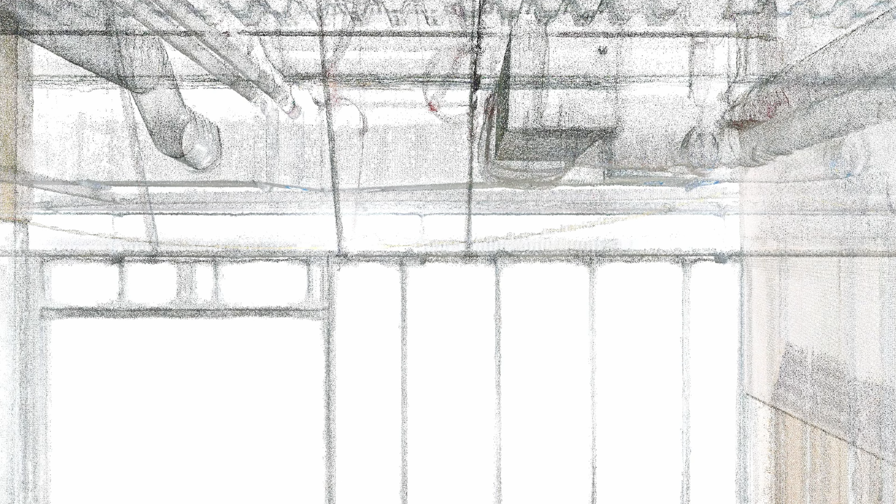So ultimately not really a fair comparison as far as density goes. That kind of goes out the window. We'll take a look at the two data sets. Actually, I'm impressed with both of them. I don't want to give too much away before we dig into it. But yeah, so that helped us define how to do it better inside of Geo Week, which is going to be really cool data sets. Anyways, let's dig right into it.

Okay, so I didn't cut anything. I just decided to fast forward through me refamiliarizing myself with CloudWorx. The problem with trying out so many different softwares and learning so many different tools is you kind of forget how to use some of them. So it's embarrassing, but I had to struggle through some of this.

One of the things I noticed right away is the clarity on the imaging from the NavVis. It's just phenomenal. When it finally all loads in, it's quite colorful. It's really clear. Now, the goal was to have an unfiltered point cloud. That's impossible with the NavVis. As soon as you load it in, it runs through some filtering. The Orbis, we were able to do it without. You have a little more control that way. But it's very minimal, as NavVis says, it's very minimal.

The only reason I know there is filtering is because I can see the trajectory path before it gets thrown in, and that had quite a bit more noise. But ultimately, at the end of the day, what we're concerned about is the final product. And this is actually pretty clear. I mean, good job, NavVis. This was shiny metal studs, and I didn't think they were going to show up well at all.

So next, I kind of want to take a look at them vertically and just see how much noise there is between the studs, because it can travel over anything reflective. But it still looks pretty freaking good for a mobile scanner. I'm not gonna lie. It's much better than the first time I tested this out. You can tell the filtering it's done, if you notice the studs are a little bit sparser than the areas near it that aren't reflective. That's because the filtering attacked that a lot more than the areas that weren't, obviously, because there wasn't as much noise on those.

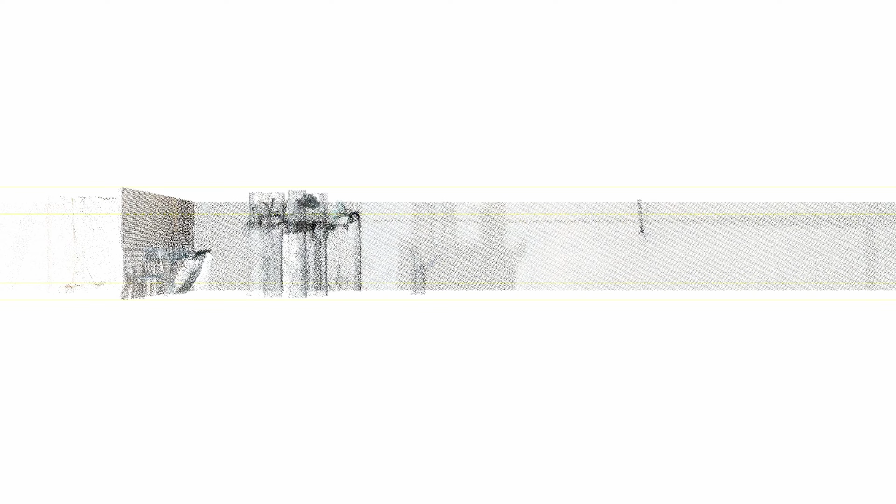But even on the ducting and the piping, that was really reflective. I mean, the entire ceiling of this building was reflective. I'll see if I can isolate it in some of the pictures or videos that we took. All in all, it's clean. It's clean. I mean, is it TLS clean? Maybe not. And at 40 some minutes, you're pushing the time that it would take probably to run an RTC through it too.

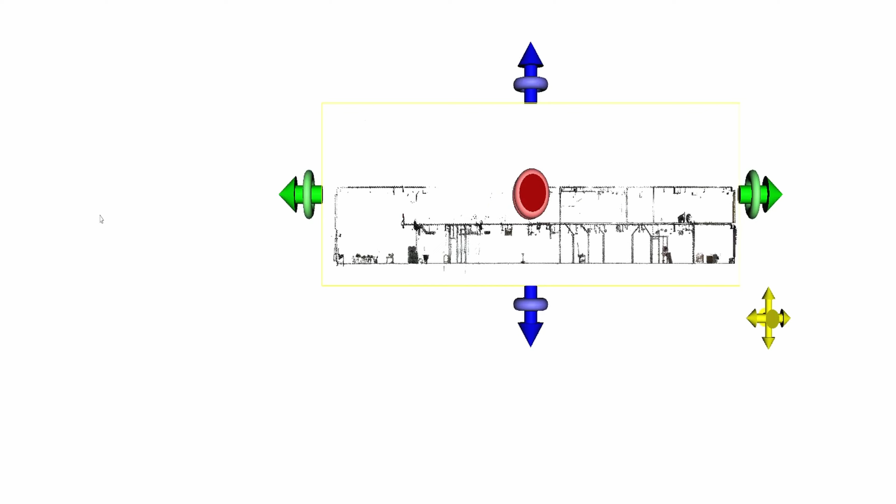And the whole point of a mobile scanner is speed, right? It is nice that it was a busy job site, and so we could keep moving and be out of people's way. Whereas with the TLS, you are kind of stuck in someone's way for a few minutes at a time. So now we're trying to look at some of the piping, I believe.

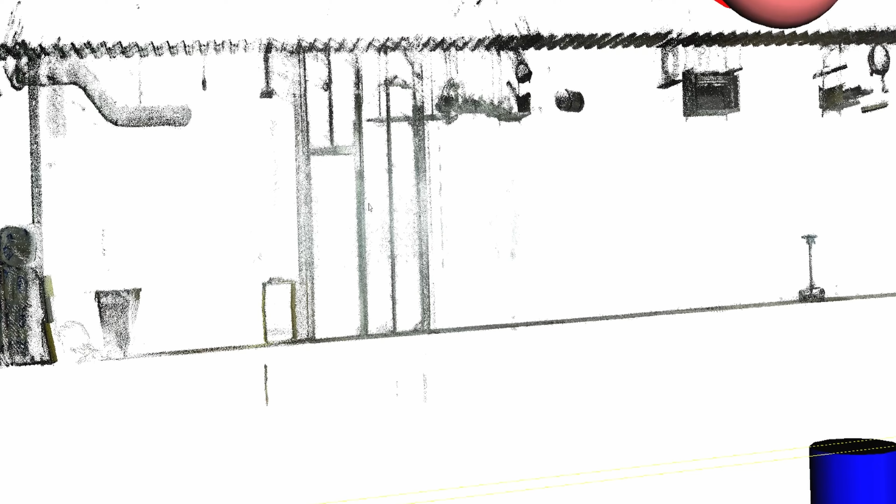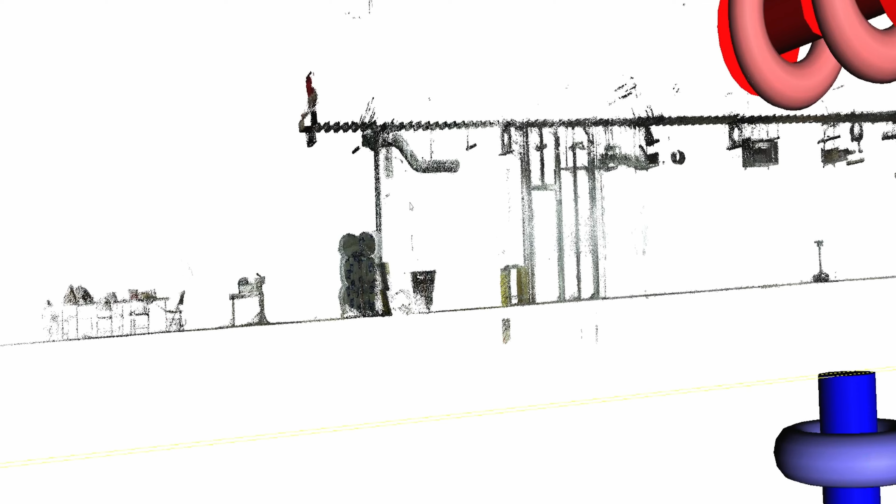I just wanted to get a couple more cuts before we go and look at the Orbis. All in all, I don't have a whole lot to complain about. We can go into the whole debate about cloud-based and trade-ins and whatnot, but as far as the point cloud goes, it's come a long way. It's looking pretty good.

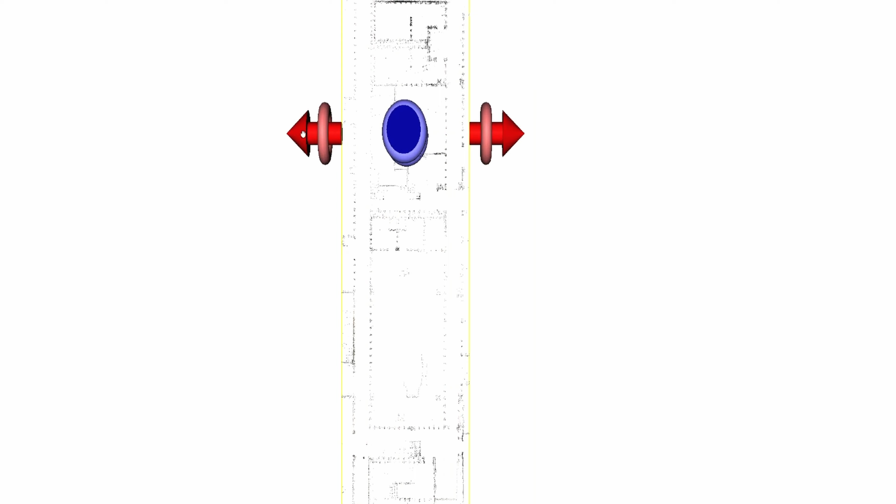Alright, now we're going to look at the Orbis. Right away, you're going to see it's much less dense. I mean, it's half the time spent scanning. But once it loads in here, it's pretty decent.

I will say that there's a noticeable difference between the camera quality. Faro's done a good job of upgrading the sensor itself, but they definitely have some work to do as far as the camera goes.

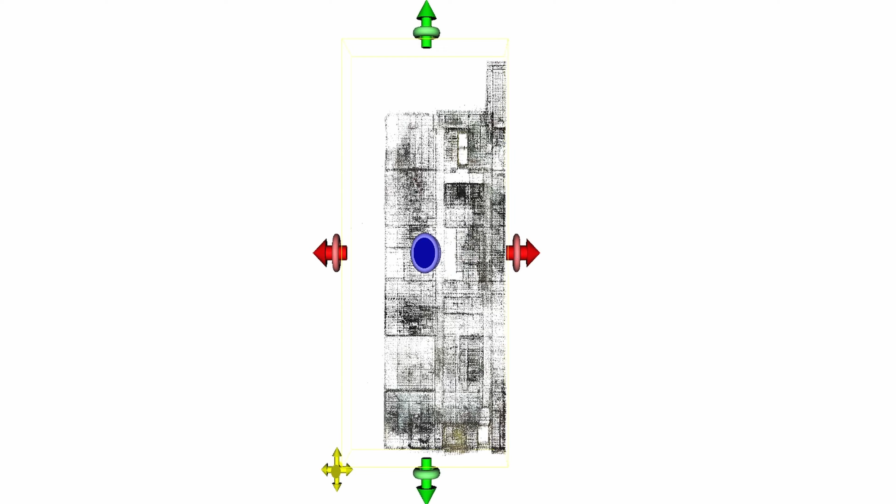Now we're taking a look at the cut. With no filtering, it's actually pretty decent. I will eventually take this and run it through a very basic filter, probably in Cloud Compare, just to see what it turns out to be.

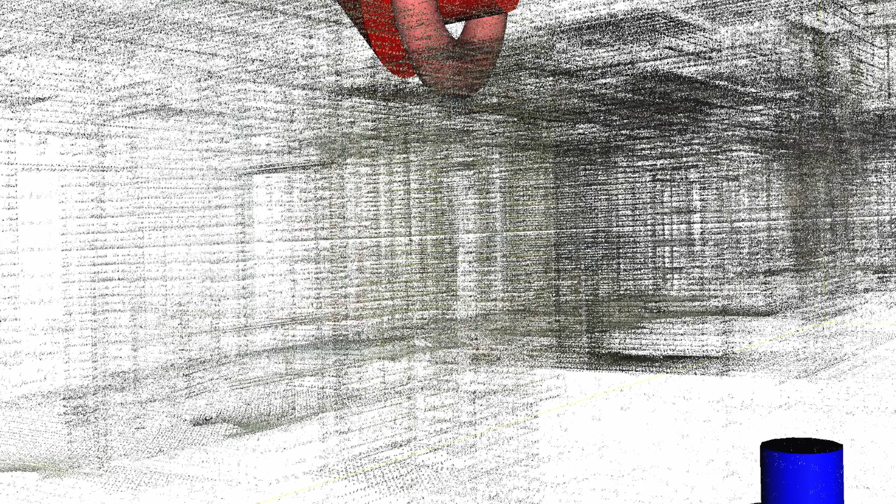But you can see the ducting and the piping, it's all highly reflective. The studs, there's not a whole lot of noise. I mean, there's definitely some noise, but for no noise filtration whatsoever, it's pretty good.

Maybe we were wrong, the builder and I, when we were saying that they were overscanning it. Maybe they knew that they were going to have to filter out a lot of that shiny noise, so getting more of it would produce a cleaner point cloud. We were looking at it more like, if we're on a job site, we're scanning for a specific reason, and we're going to attack that reason and move on with our day, because typically it's not our only scan of the day.

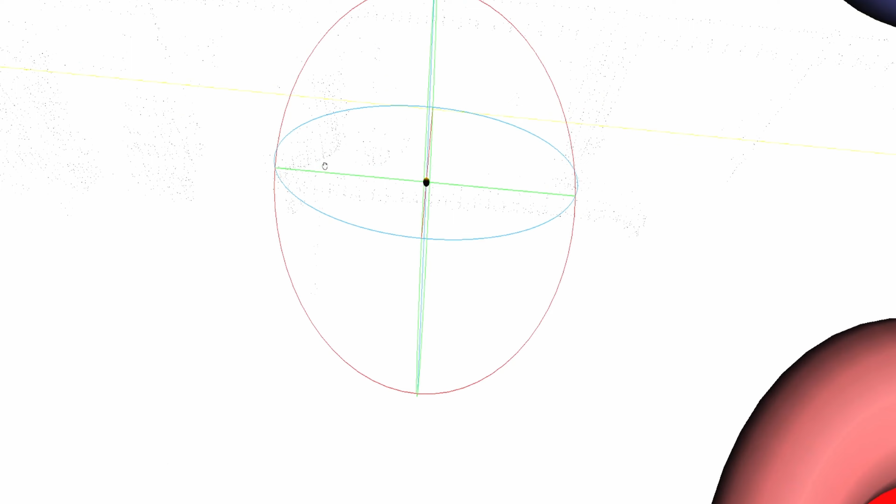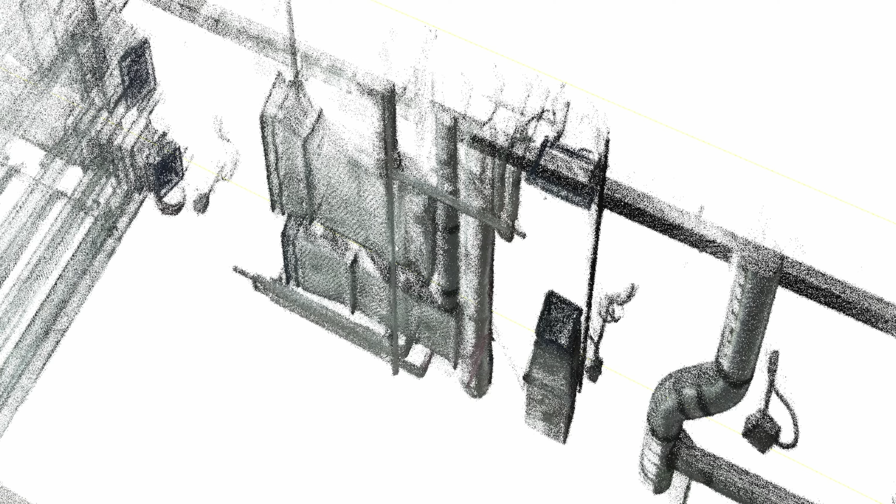I'm going to readjust real quick and see if I can find a better spot on some studs. Again, not as clean, but again, also no filtering and half the scan time.

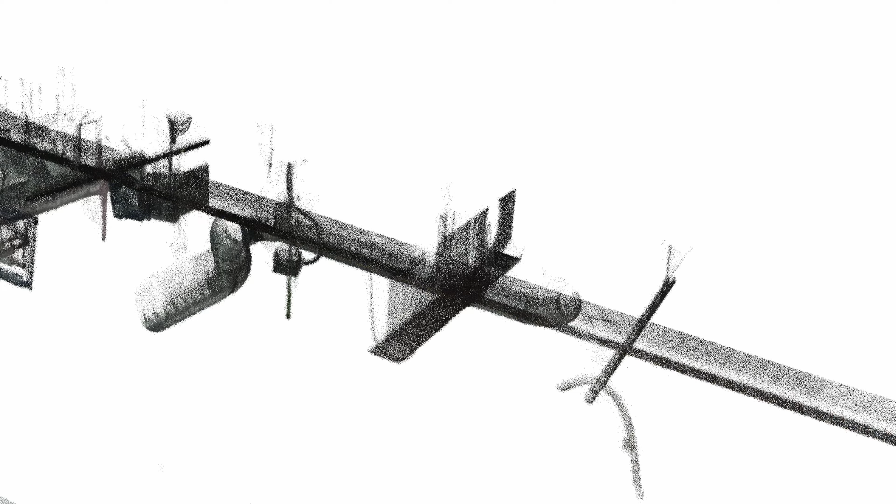And you'll have to forgive me, sometimes in this software I get a little, I zoom in too far. Then, since it's reverse of everything else I know, I have to remember to scroll the other way quite a bit, or else I'll just forever be past the point cloud.

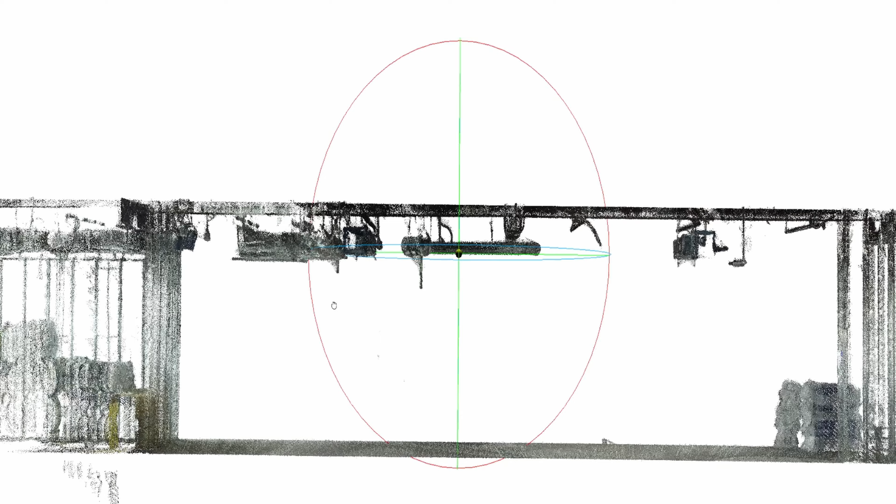What I'm doing now is just scrolling around trying to find out if there's any just terrible areas or really good areas, just searching for anything abnormal. Kind of peeking around. Now the imaging does really well on the reds and the yellows, I notice.

There's some piping and some more ducting, which actually all in all is really not noise free, but much less than I expected.

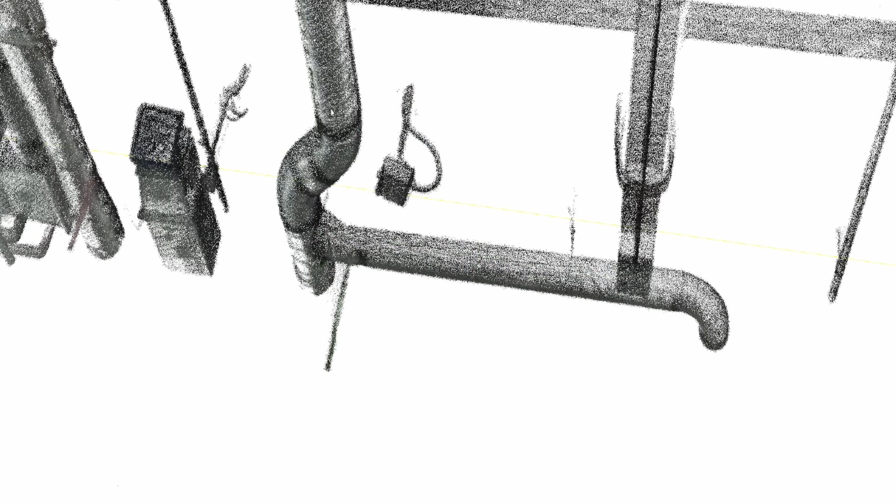Some of the other mobile scanners that I've tested, I don't want to name them here, will not even show anything reflective, and that's even just in GeoWeek. I took some of them around, and there was a lot of reflective surfaces, and they just were dead spots in the scan data. And there were some that excelled exceedingly.

So here we go. This is a nice little cut.

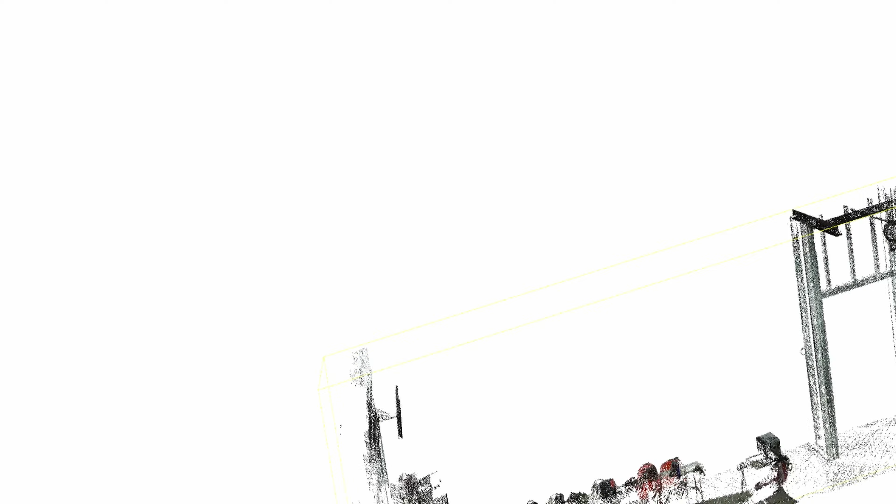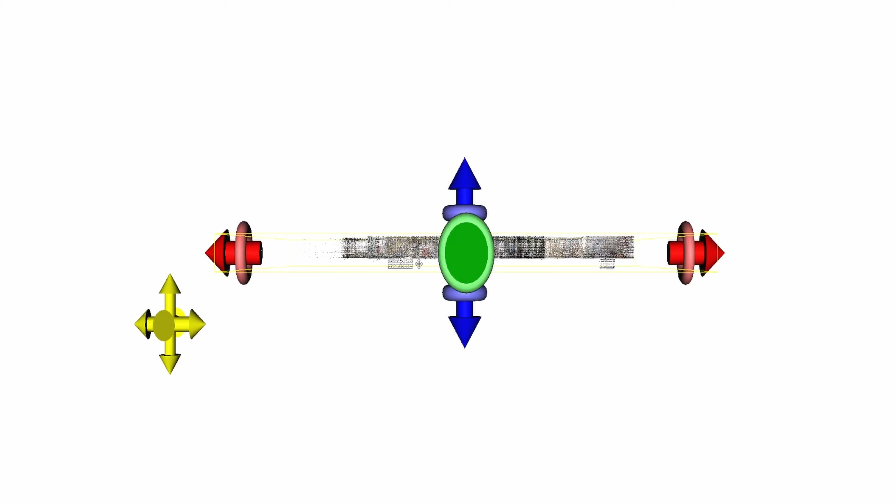There's some piping and some ducting, and all in all, with no noise filtration, I know I keep picking on that point, but I go back and forth on the idea. I always think I want to see it before it's cleaned, because that will tell me how good the sensor is. But ultimately, the other side of that coin is, do I really care? What I care about is the final product that I have to build off of.

Now, I don't want it to falsify data, but I also want it to be nice and clean and good looking. I mean, look at that. That's beautiful, and that's all pretty reflective. Again, the imaging could be better.

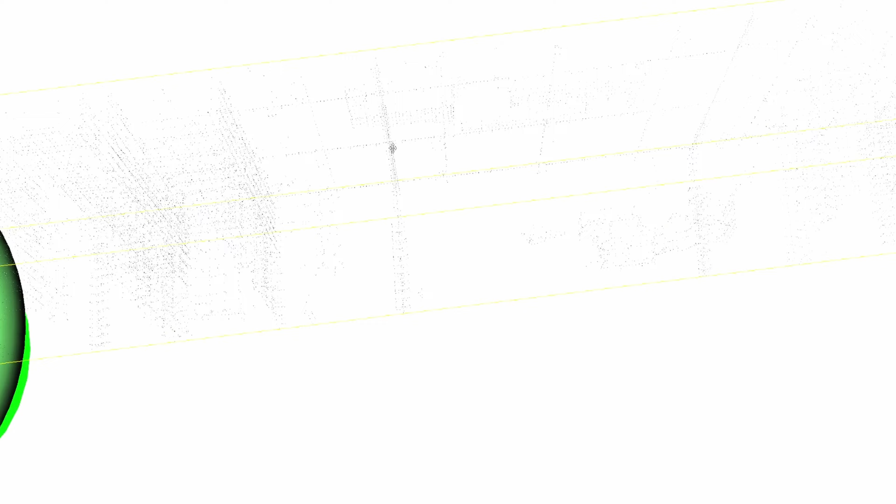But this is the first release of the Orbis, and everybody's probably rolling their eyes right now saying, well, it's the second release of the GeoSlam, but then you're not incorrect. Much like they upgraded the NavVis with different sensors and cameras, they upgraded the Orbis with different sensors, and I think the same camera, but it looks pretty good. I'm kind of isolated.

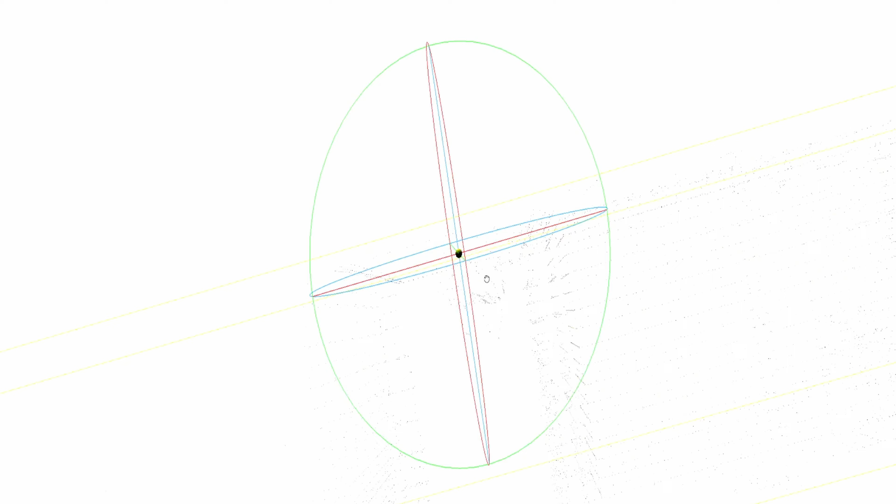Run a quick noise filter. One of the things I've noticed with mobile scanners is if you run a noise filter that's not meant necessarily for mobile scanners, it will eliminate a lot of data, because it's just noisier than TLS data. Sort of like when I run a meshing program, if the mesh fails pretty bad or looks googly, I know that the scanner is not great. It takes a really high quality scanner to produce a high quality mesh.

I'm going to speed this up a little bit so we don't have to wait for this whole thing. And there it is. It's actually definitely sparser. It reminds me of the sparseness of the studs in the NavVis data.

I'm pretty impressed. 20 minutes, we captured this entire building. And if I were to pull this out again, it's not just this floor. We captured some of the second floor, went up the stairs, all while filming, which I always joke that I spend about twice as much time filming the scans as I do scanning. It's quite sad, really.